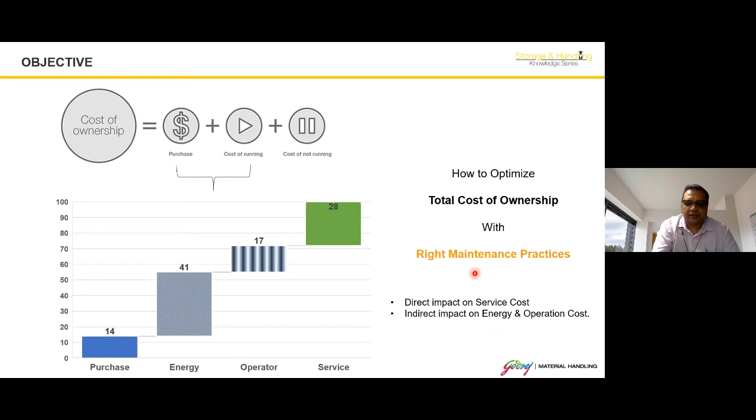There is no perfect practice, no perfect maintenance practice in this world. It has to be tailored as per the requirement. There is no thumb rule, no standardized maintenance practice which can be replicated at all places for all the equipment. It has to be derived. And when you have to derive the right maintenance practice, you have to understand what it is a function of, what elements, what variables will decide whether we are able to create the right maintenance framework for our organization or not.

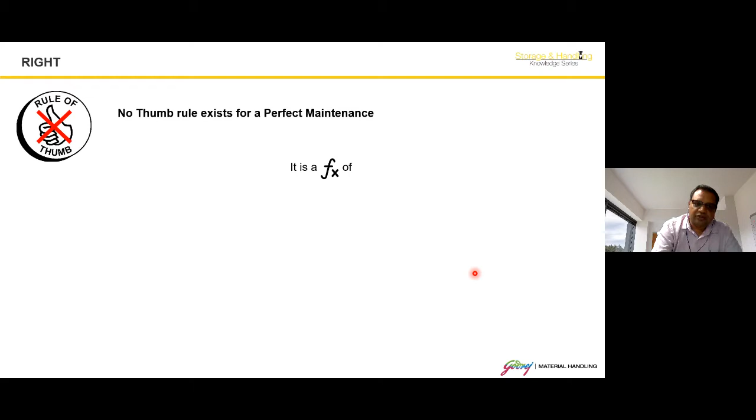It is basically a function of three elements. The first and very important one is throughput. What is your throughput requirement? When identifying your throughput requirement, let us assume you say this many average working hours my equipment is supposed to be used, and this is the amount of material it has to move from one place to another.

But we also have to consider whether this throughput requirement is uniformly distributed, or there are some spikes or seasonality, like organizations where the throughput requirement suddenly peaks at the end of the month, or certain seasons where there's a spike requirement of throughput. To achieve that, you have to customize your maintenance practices to suit these spike requirements, because you have to prepare for that. So once we understand the throughput, we also need to understand the variations and spikes, and that will help us in designing the right maintenance practice.

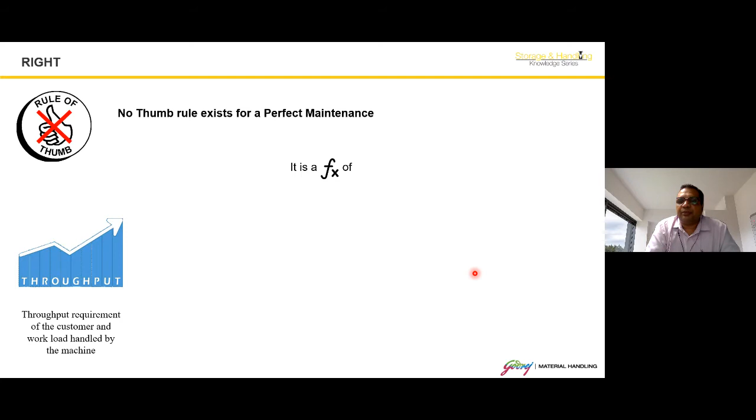So this is the first variable which we have to consider before deciding what is the right maintenance practice for my equipment or my organization.

The second aspect we have to take into consideration is the working environment. In which work environment is my equipment expected to be used? Every organization or customer is unique, with its own requirements and limitations. There are equipments used in a dusty environment, places where humidity levels are very high, and places where equipments are used in very high temperature zones.

All these things create a working environment around the equipment, and we need to understand the impact this environment will make on the equipment. This should help me decide how I'm going to neutralize that impact, and what kind of precautions or maintenance practices I'm going to create for my organization, which will help optimize the cost of ownership. So the second important variable in identifying the right maintenance practice is the work environment. And the third important aspect is, what is the criticality index of the equipment?

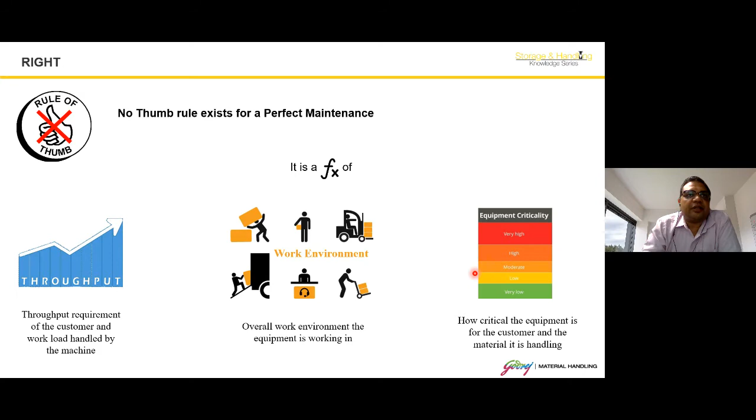So these are the key three variables which need to be considered before you tailor your maintenance practices. Now that we have understood how to derive what is right for my equipment or my organization, we can move forward to the other factors which will impact these right maintenance practices.

Based on these variables of working environment and throughput, maintenance practices will vary from customer to customer, because for the same throughput requirement, the behavior of the organization also has to be considered. What is the type of culture that organization has? What practices is this organization following? That also impacts the maintenance practices, so different customers will behave differently.

For a logistic company, material handling equipment may become a life and death issue for them, because their whole operations are only dependent on that equipment, and if that equipment is not operational, their production or their whole operations will stop.

For some other places where they have flexibility, they can stagger their dispatches, the criticality of that equipment may not be very high for that customer. So maintenance practices will vary organization to organization, customer to customer, and industry to industry.

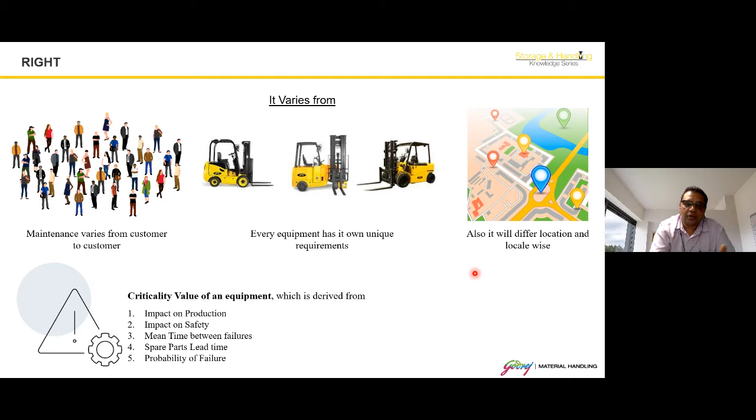So if I have to summarize all these things, the operational expectations and requirement of the organization, the throughput, your criticality index, your working environment, we can summarize it as an application. Before identifying or selecting the right product, we should have a deeper understanding of the application.

Application is nothing but a summarization of all these points where you identify what will be my throughput requirement, what kind of working environment I have to work in, what will be my expectations or requirements and challenges working at a particular place, and then accordingly you decide what is the right product and right maintenance practice for your application or organization.

These are the factors which need to be considered before finalizing what is right for my product or my organization. So if I summarize, on what factors we will identify or create the right maintenance practice.

First thing is very clear: there is no thumb rule, there is no perfect maintenance practice, it has to be derived. When you are trying to derive the right maintenance practice, you have to understand the requirement, expectations, the age of the equipment I have, what working environment I am working in, what is the application, what is the criticality, and what environment I am in.

If I am working in a coastal environment where the humidity is going to be high, then I have to understand how it is going to impact the various components of my equipment.

Or if I am working in special temperature zones like cold storage, where the equipment is used for -20 or -30 degrees centigrade, what impact will that have on the components, and how will the failure patterns change, and to compensate for that, what right maintenance practices should I follow, which will help optimize the total cost of ownership and also meet the throughput requirement of my organization. So this is all about what is right.

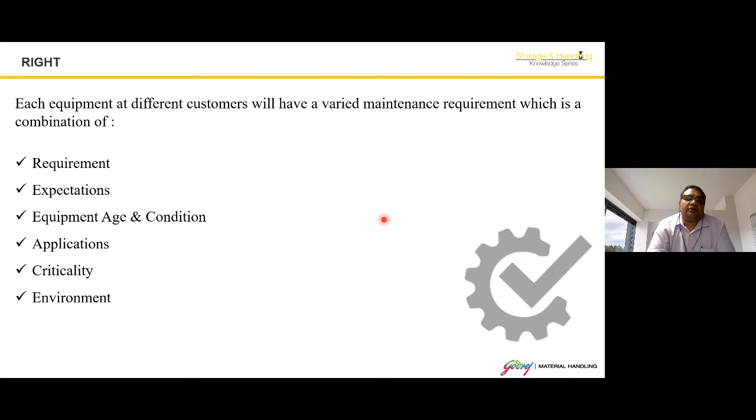Once we have the understanding of how we can derive a right maintenance practice, let us talk about what is maintenance and what are the different kinds of maintenances performed for the repairs of any machine. So basically, broadly, there are

three broad types of maintenances performed on each machinery or equipment. The first is breakdown maintenance. It is basically a reactive maintenance, wherever any problem crops up and you have to identify the problem and solve it. It is basically reactive. You have to prepare for that eventuality, and how you complete that maintenance activity in the shortest possible time will decide what kind of turnaround time you can expect.

We will go deeper and understand the pros and cons of each kind of maintenance, but breakdown maintenance is quite understandable. It is basically a reactive maintenance. Whenever a failure has happened, how you are going to set it right in the shortest possible time—that is breakdown maintenance.

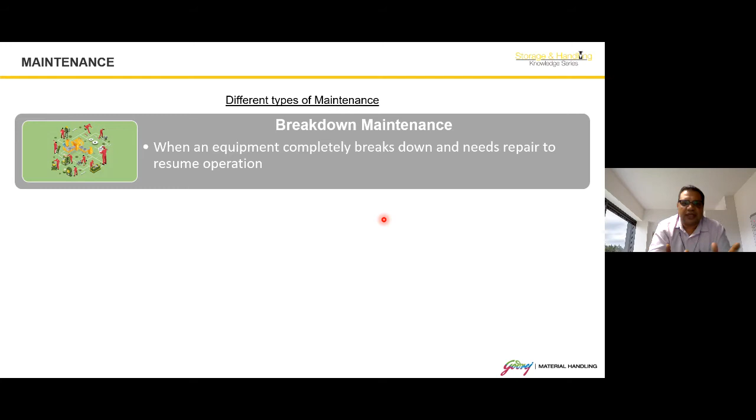The second is periodic maintenance. Periodic maintenance is the regular and routine maintenance of the equipment which needs to be performed at a particular time interval, with a predefined set of activities to be done on the equipment. It is basically done to safeguard your costly sub-assemblies and enhance their life. You need to do this periodic maintenance at a particular schedule which is given or derived.

Sometimes, when you have a good understanding of the environment, you may have to modify those periodic maintenance frequencies to cater to specific working environment challenges. So periodic maintenance is basically defined by the OEM, but if it has to be tweaked, you need a good understanding of the working environment, what kind of impact it is going to have on the machine, and what kind of tweaking is needed, which will help in optimizing the cost of it. So this is periodic maintenance.

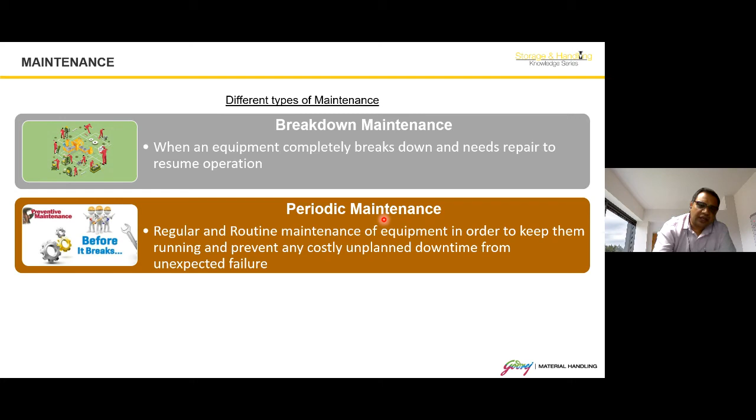And the last thing is predictive maintenance. Predictive maintenance is where either you use a highly skilled or experienced person to predict failures, or you use data. Nowadays, people mostly use data because it is possible to get that data from machines. You can monitor certain vital parameters through various devices, collect that data, and with that knowledge and understanding, see how variations in a particular parameter impact the operation of a sub-assembly, and how you can predict failures. So basically, predictive maintenance helps you avoid unplanned breakdowns.

If you can predict failures, you can avoid unplanned breakdowns or the sudden shocks you get when the equipment requirement is at its peak, and suddenly you find there is some problem with your machine and you are not able to fulfill the task at hand.

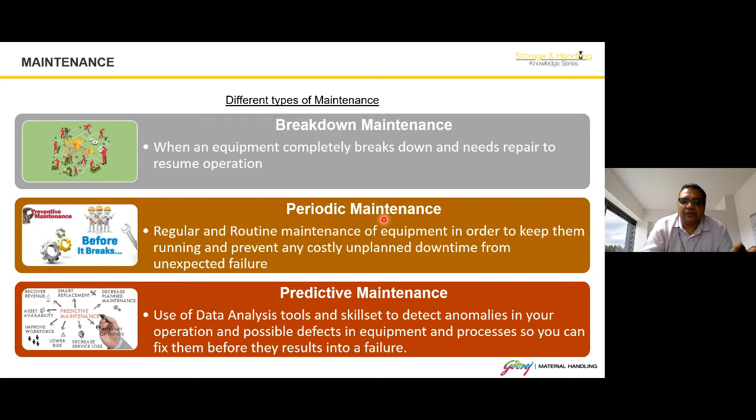So let us go deeper. What is breakdown maintenance? Breakdown maintenance, as I've said, is a default reactive maintenance practice. It is like, if there is a component which is not very critical, it can be replaced in the shortest possible time. The availability of that component is easy, and you don't need very special skill to repair that thing.

So normally people say, instead of doing predictive maintenance or prematurely removing that component before failure, I will wait for the failure, and I can do that because I have the right skill, I have the right component, it is easily available. To make an analogy, normally we are not very afraid of a normal cold or flu, because we know that even if it is there, I can get the medicines at a very nominal cost. I can get a general physician who can consult and provide the required guidance, and I can be up and running again in a very small possible time. So we are not worried about those kinds of ailments.

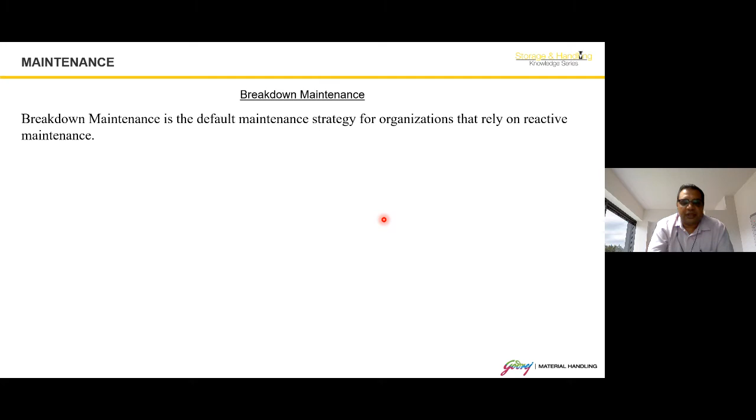So breakdown maintenance is mostly done when any small component like bulbs or a fan belt or something like that, non-critical components which are low value items, and it can be replaced in a very short possible time. So people do that kind of maintenance.

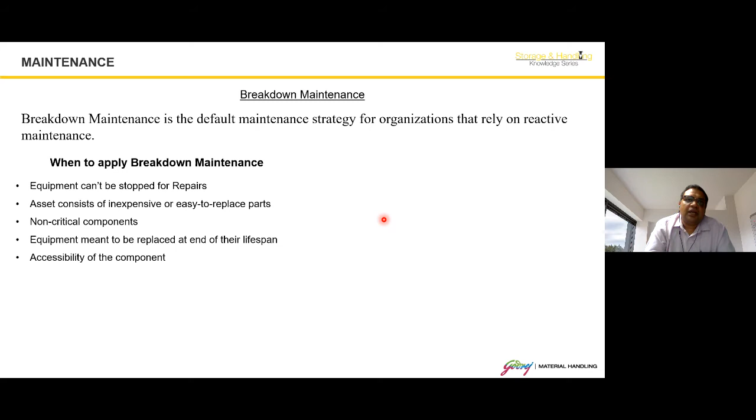The only thing they have to consider is whether they have the right skill to repair the machine. So what they have to do is assess the skill they have in their organization, or if they don't have it, how fast they can source it from outside, whether those skills are easily available outside your organization.

Then sometimes whenever you are doing the breakdown maintenance, whether your people are skilled enough to take the repair versus replace decision. So if any component has failed, a maintenance guy has to make a decision whether he wants to repair that component or replace it. Because if he is not making the right decision, your failure rate will increase.

And you have to have a fine balance. If you are replacing all the time, then your cost of maintenance will increase. So you have to find that right balance between whether to repair or replace, and that requires skill. So if you are doing breakdown maintenance, you have to assess whether you have the required skill set to make those repair versus replace decisions, and what will be your turnaround time—how fast you can bring back the equipment in operational condition.

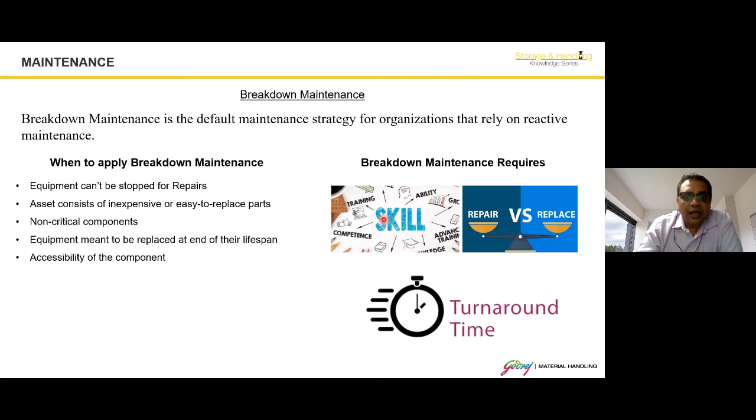Now, for the pros and cons of breakdown maintenance: if you are overly dependent on breakdown maintenance and allow all the components to fail, it may result in a cascading effect, and multiple components may fail simultaneously. That is a bad situation for any maintenance person, because if multiple components have failed, it is very difficult first to troubleshoot and identify what has gone wrong in the machine.

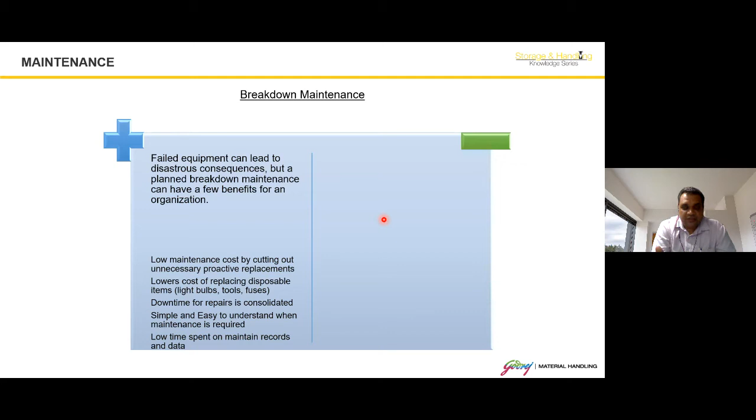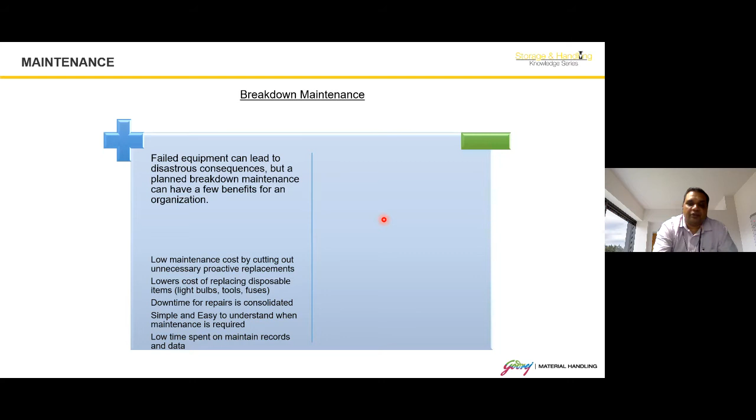The second part is whenever you are doing that maintenance, whether you are only seeing the symptom or you are able to identify the root cause of that failure. So it is good where the failed components are low cost, can be replaced, downtime is less, but it is not very desirable where you don't have the required skill set to take repair versus replace decisions, or the capability of identifying the root cause. Otherwise, you will always keep resolving the symptoms, and it may result in repeated failure.

And it may lead to a failure of a high cost subassembly also. So those are the pitfalls, or you can say disadvantages, of doing breakdown maintenance. So normally it should be avoided as far as possible unless it is a very low cost component.

The second part is there are organizations who take planned breakdowns. Why do they take planned breakdowns? Because for them, unplanned breakdowns are not desirable, because the criticality index of that equipment is very high, and they cannot afford the equipment not functioning when their production is at peak.

So normally, a lot of industries take planned breakdowns. They take shutdowns where they dismantle the machine, open it, and identify what needs to be replaced. They should have the full-fledged maintenance setup to do that, or they outsource or source this capability from some external agency, and then do the maintenance.

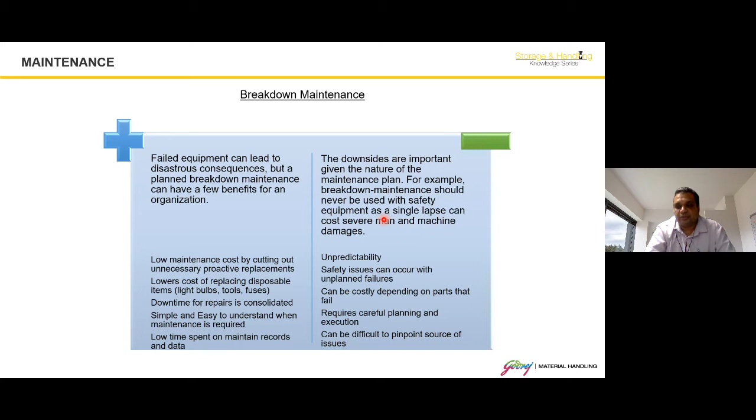The third part is whether it is possible to take planned breakdown maintenance, and you can complete the maintenance activity in one go, ensuring that you are not compromising on the reliability factor of your machine. So this is about breakdown maintenance.

Now we go with periodic maintenance. Periodic maintenance is like our simple low cost things which need discipline and will to do. Like we all know, for a healthy life what we need is to exercise regularly, have the right eating habits. Not very costly.

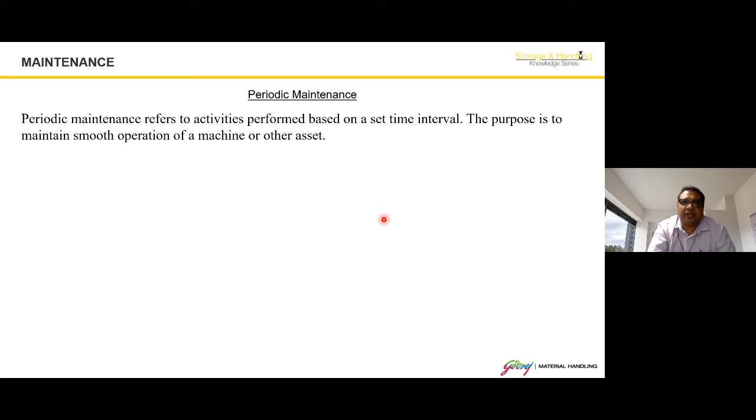It is possible, easy. It does not require very high skill for doing that, but it requires discipline and will. Normally people follow routine preventive maintenance schedules, and they are supposed to complete that activity, whatever has been guided or designed or crafted for themselves.

The other challenge in periodic maintenance is teamwork. If you have identified the frequency at which you are going to do preventive maintenance, and the equipment has to be reported for periodic maintenance at that time, you need cooperation and support from your operational people. The major challenge people face is that because this maintenance has to be done when the equipment is in operational condition, the operational teams are not able to release the equipment because of their work pressures, so they are not able to release it for routine preventive maintenance.

So that cooperation or alignment is needed between both teams, where they understand each other's limitations and challenges, and identify the right way which will help them perform periodic maintenance in a timely manner without missing it.

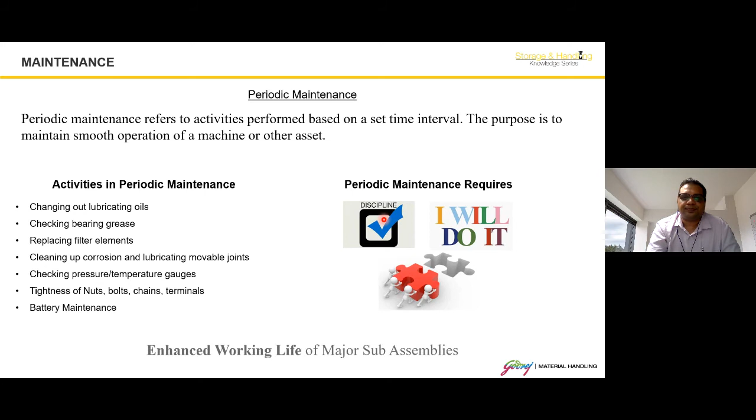Now if you see the advantage and disadvantage, these are very simple, so I will not spend much time on that. I have covered various things - its initial cost is low, it is not a very high cost investment, and it requires mostly discipline.

Sometimes people may think, why are we replacing certain consumables or filters before failure when they can still be used? Because we are trying to de-skill things, we don't want people making those decisions of when to replace, what to replace. They are supposed to follow a particular schedule identified or created by the organization or the OEM for that product - please don't use your own judgment here.

This is the schedule which has been created and you are supposed to follow that schedule. Mostly it is not very difficult - it does not require very high skill, but it requires that discipline and will to do it.

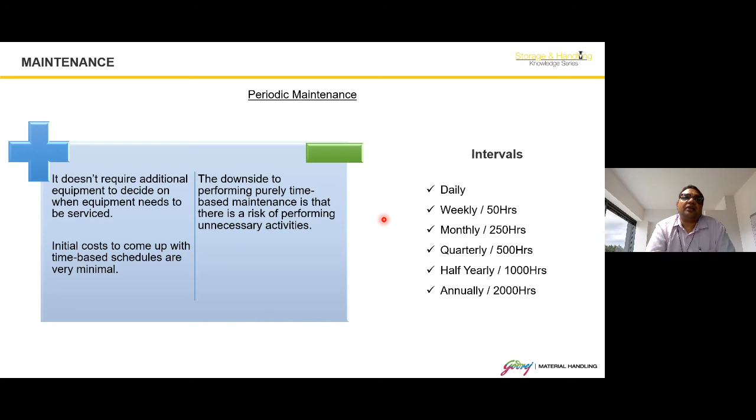So after periodic maintenance, let us move to predictive maintenance. Again, using the same analogy of how we maintain our own bodies - up till now what we were doing was taking health checks on a yearly basis, where we monitor certain vital parameters.

Doctors would carry out those tests, and an expert person would see the results and identify what symptoms or patterns he can see. Accordingly, he decides what needs to be done or what precautions need to be taken to avoid any major failures in the future. So this was the basic understanding, and this is how it used to be done.

And it requires - what was the most important thing at that time? That person who has the knowledge and understanding, after seeing that report, can understand and predict correctly which component or subassembly is expected to fail, what is the cause of it, and what kind of repairs need to be performed now to enhance or increase the life of that subassembly.

But nowadays, with the development in technology and all those things, we can get this data in real time.

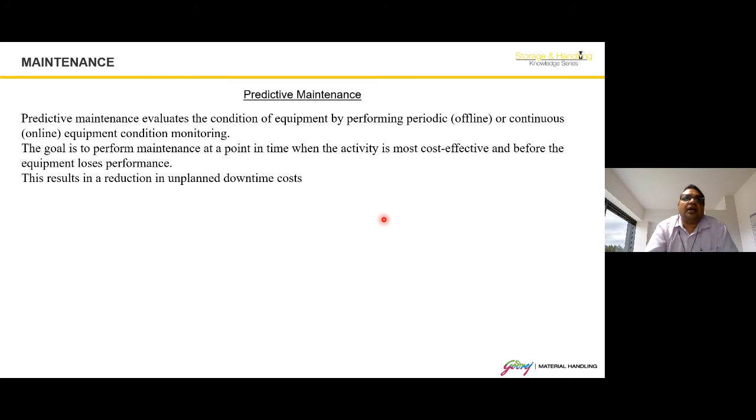So it is a good thing. It has to be done. And predictive maintenance is very important if you want to achieve higher uptime of the machines, because it helps you in avoiding any unplanned or major breakdowns. So you can prepare yourself or your organization for that kind of eventuality and take proactive measures.

You can plan your activities, so you can source the item which is expected to fail earlier, so that whenever it is going to fail, or if you want to replace it proactively, you can do that. It increases the asset uptime up to 30%. So if you are having uptime of a machine of, let's say, 80-85%, you can increase it by 30%. Predictive maintenance is mandatory if you want to achieve anywhere between more than 90% or 95% uptime of a machine.

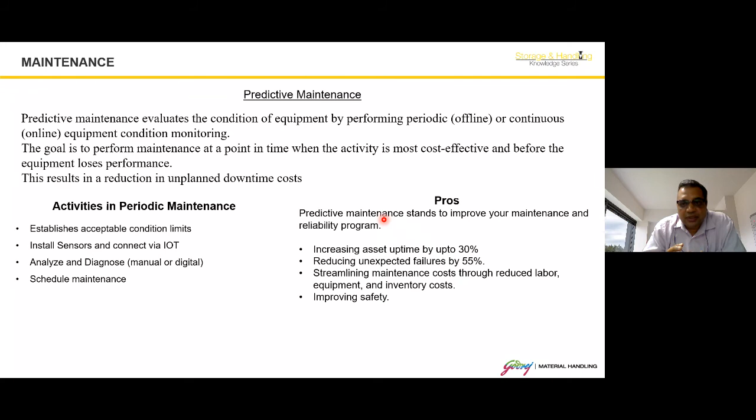Because then only you can complete all the support activities which are needed, either to do repairs in a proactive manner, or ensure that whenever maintenance is needed, you can do it in the shortest possible turnaround time. So this is the thing. This is the beauty of predictive maintenance.

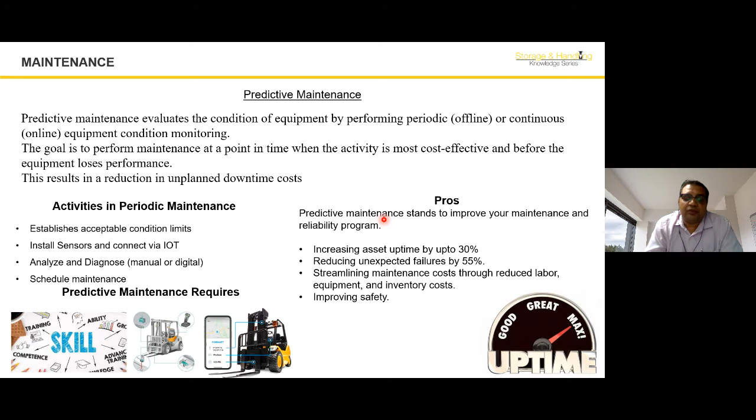It requires some investment in terms of collecting those vital parameters or information from the machine at a particular frequency. With the advent of technologies, you can collect this data at very small frequency intervals also, and it will help you, but you require that skill set.

So now with machine learning, there are complex algorithms written which can help you in taking those decisions, but if they are not available, you need to have special skill and experience to take measures needed at that time to avoid breakdowns in future. So it basically helps you in maximizing your uptime. Predictive maintenance is nothing but helping you maximize your uptime.

So now when we have this understanding of the different kinds of maintenance performed on a machine, we have reached a level of understanding of how we can identify what is right for my machine. We have the understanding of the objective. We know where we want to reach. What are the factors I have to consider to design the right maintenance practice?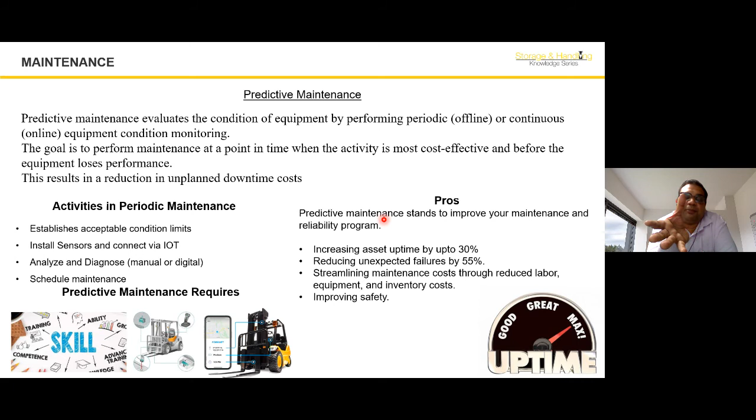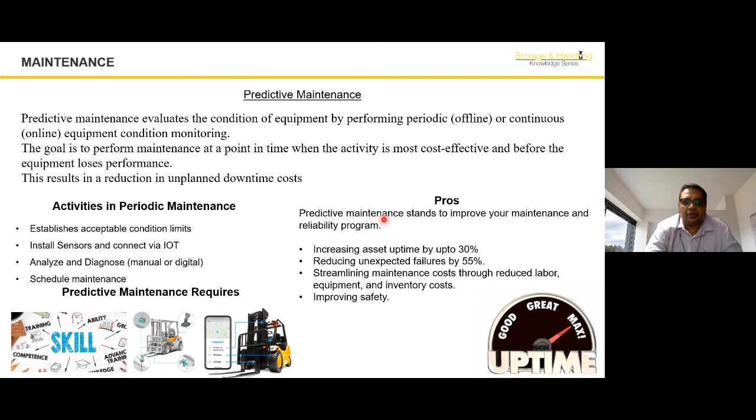Then what are the different kinds of maintenance I'm supposed to perform? What will be the mix I have to keep to optimize the cost of ownership? So we are clear about what has to be done. Now the thing is how it has to be done. Once you have clarity on what has to be done, people evaluate their strengths and priorities, or organizational priorities, and create a framework for how these maintenance practices, whatever they have derived or designed for their operations, have to be performed.

So there are organizations who take the decision that they will execute themselves, and they have the right maintenance setup, and they source the knowledge or resource on a need basis from outside. And there are organizations who would go with the asset-light model. They don't have such high resources, and they outsource the activities to somebody.

So accordingly, there are different kinds of maintenance plans which are crafted or designed to meet the various maintenance needs of the customers, whether related to only technical assistance, preventive maintenance, or a full service contract where people want to offload all activities to somebody who is the subject matter expert in performing those activities. So this is where every organization decides how I'm going to perform those maintenance activities.

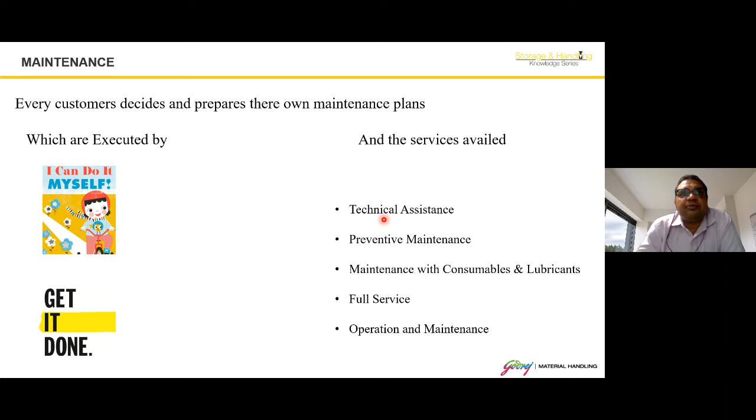Now, once we have reached an understanding of how it has to be done in my organization, we try to focus on how they are going to get performed. So then the practice will come into the picture. Once we have clarity on what is right for my organization, what kind of maintenance I am going to do, what kind of mix I will have, what skills or resources I am having, what is my maintenance philosophy.

I have decided what I'm going to do in-house and what I am going to do outsource. Then, what are the practices that have to be followed for execution, whether it has to be done in-house or by any external agency. There has to be some practices to ensure that whatever I have identified or planned is happening and getting executed in the right manner. So these practices play an important role.

There are execution practices followed by organizations. Mostly they schedule their maintenance activities. Earlier they used to have a calendar for scheduling. Now, with IT support, you can schedule activities on any platform, which can give you reminders 5 days prior, or send notifications and alerts that this activity or task has to be completed during this time interval. Please plan your activities, and we need to have the discipline of checks, ensuring that we adhere to the schedules we have created.

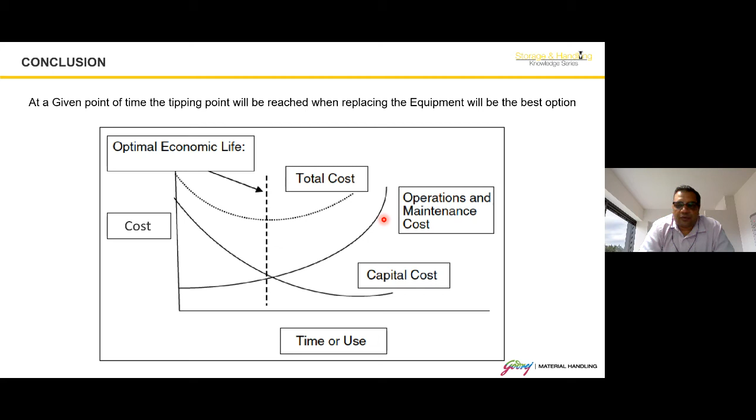So I think I have overshot some 10-15 minutes. Sorry for that. But with that, I have covered whatever I wanted to convey. Thank you all for patient listening.

Thank you so much, Manish. No problem about overshooting the time because I think this was a very, very important topic, and the way you explained it, people would rather appreciate this extra 15 minutes because a lot of important aspects were covered in this almost 1 hour 15 minutes of talk.

So there are a lot of questions we've got, and I'll ask them one by one. But I think one key takeaway from this webinar was when you said there's no thumb rule for a right maintenance practice, and we really need to define it as per the application, the equipment, and the throughput. That was very nicely explained. And then you went on to explain the different types of maintenance. The last part was really very important, where you spoke about the tipping point, where replacing the equipment becomes a more commercially viable decision than continuing to operate it and incur maintenance costs. So I think it was very well covered.